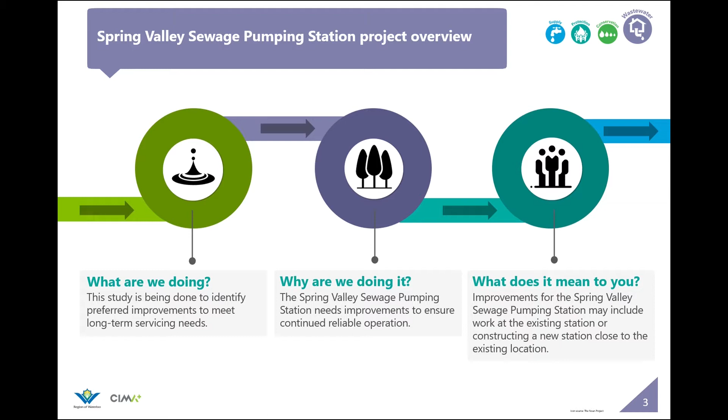Spring Valley Sewage Pumping Station Project Overview. To better understand the project, we ask the following 3 questions. 1. What are we doing? 2. Why are we doing it? And 3. What does it mean to you? To answer the first, this study is being done to identify preferred improvements to meet long-term servicing needs for the Spring Valley Sewage Pumping Station. Why are we doing it? The Spring Valley Sewage Pumping Station needs improvements to ensure continued reliable operation. What does it mean to you? Improvements for the Spring Valley Sewage Pumping Station may include work at the existing station or constructing a new station close to the existing location.

Pumping stations are an important part of our wastewater system. Wastewater is generated at homes and businesses through everyday activities like showering, flushing the toilet, or washing the dishes. When it leaves our homes and businesses, it enters the city's underground network of sewers. Wastewater flows through sewers by gravity from areas of high elevation to areas of low elevation. Pumping stations like the Spring Valley Sewage Pumping Station are an important part of the wastewater conveyance system. They make sure that wastewater from low-lying areas gets to the region's wastewater treatment plant for treatment. In Kitchener, there is one wastewater treatment plant that receives wastewater from many pumping stations across the city. The wastewater treatment plant ensures that wastewater is fully treated before clean effluent is returned to the Grand River.

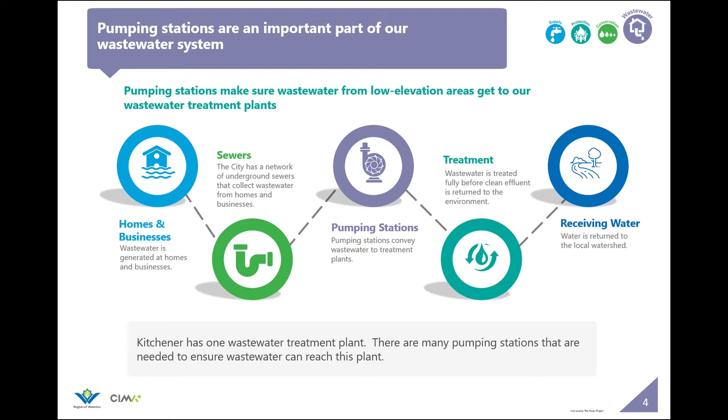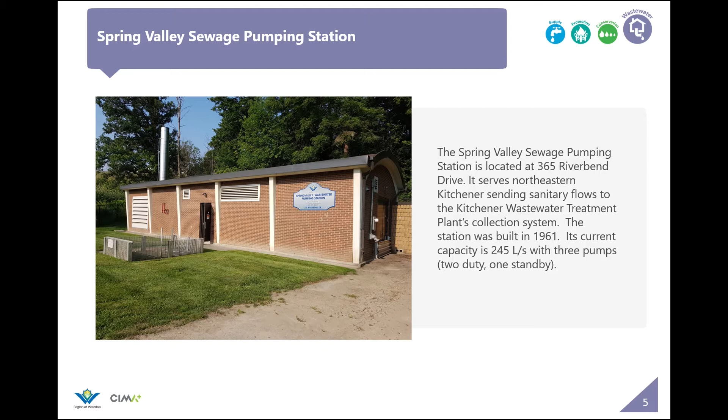Spring Valley Sewage Pumping Station. The Spring Valley Sewage Pumping Station is located at 365 Riverbend Drive. It serves northeastern Kitchener, sending sanitary flows to the Kitchener Wastewater Treatment Plant's collection system. The station was built in 1961, having been in service for almost 60 years. Its current capacity is 245 liters per second with 3 pumps, 2 duty, 1 standby.

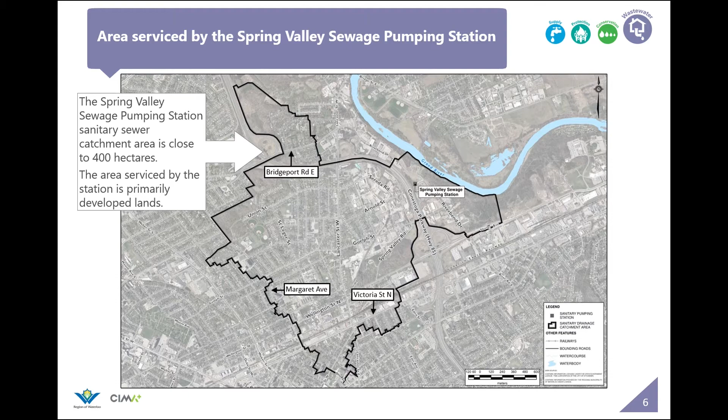Area serviced by the Spring Valley Sewage Pumping Station. The Spring Valley Sewage Pumping Station Sanitary Catchment area is shown on this figure. The area serviced by the station is primarily developed lands and generally extends south to Victoria Street North Highway 7, east to the Grand River, north to Bridgeport Road East, and west to Margaret Avenue. Currently, the total service area is approximately 400 hectares of residential, business parks, industrial, and open spaces.

Future capacity of the Spring Valley Sewage Pumping Station. During the Spring Valley Sewage Pumping Station Class Environmental Assessment Study, we took a detailed look at future peak flows using flow monitoring and modeling software to confirm the required future capacity for the station. The model examined future flows to the Spring Valley Sewage Pumping Station, including the predicted impacts of climate change and the addition of future developable industrial lands using information provided by the City of Kitchener.

The modeling results informed the recommendation to increase the Spring Valley sewage pumping station capacity to meet servicing needs up to the year 2051. Major infrastructure, which will be around for a very long time, such as the pumping station building and tanks, will be sized to meet the long-term 470 liters per second firm capacity. Equipment with shorter asset lives will be sized to meet the short-term 350 liters per second firm capacity. Examples of shorter asset life items include items such as pumps, instruments, and standby power generators.

An important consideration for the Spring Valley sewage pumping station was adding emergency storage. Proposed alternatives incorporate 1 hour of emergency storage based on the City of Kitchener design standards and best management practices from other municipalities. This will ensure that the station is more resilient to wet weather events due to climate change and provides improved protection to the natural environment.

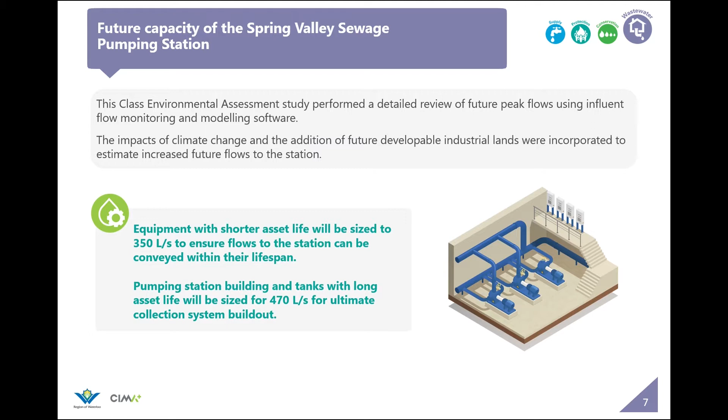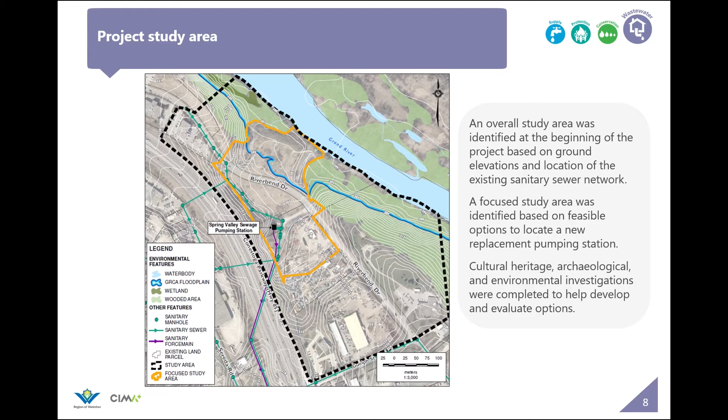We did an initial review of background information and identified an unevaluated wetland, woodland, steep slopeland, and watercourses within the overall study area. Because of this, we created a more focused study area to avoid sensitive natural features. The focus study area includes private and public property near the existing Spring Valley sewage pumping station, as shown here with an orange line. Investigations were conducted to assess cultural heritage, archaeological, and environmental impacts as they relate to the alternative solutions.

Cultural heritage findings in the study area. A cultural heritage resources investigation was completed as part of this study to evaluate culturally significant structures and landscapes located within the overall study area. The first step was to research the historical context in the overall study area. City of Kitchener and Region of Waterloo planners responsible for heritage matters were consulted. Any designated or recognized properties within the limits of the overall study area were identified and cataloged.

The project team completed a site inspection and created an inventory of all properties with potential built heritage resources and cultural heritage landscapes within, adjacent, and in proximity to the overall study area. Each potential cultural heritage resource that was identified was evaluated on the criteria set out in Ontario Regulation 9/06 for determining cultural heritage value or interest.

2 City of Kitchener identified cultural heritage landscapes were located in the overall study area, including the Grand River Corridor and the Walter Bean Trail. An evaluation of potential project impacts on the cultural heritage resources was also completed and strategies were identified to protect them in the future.

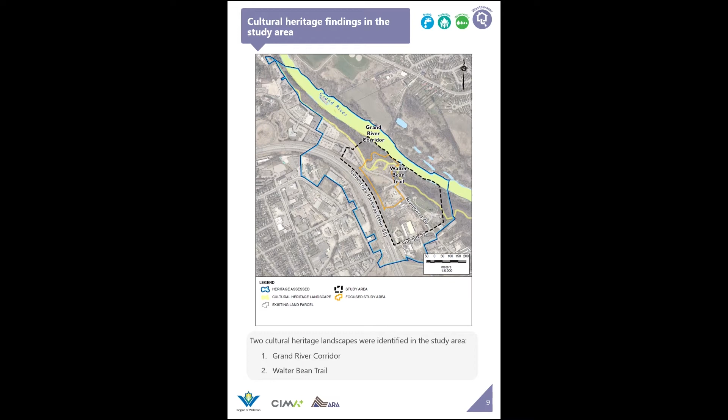Archaeological findings in the study area. A Stage 1 archaeological assessment was performed to provide a comprehensive review of archaeological features in the overall study area. This was done through an examination of the archaeology, history, geography, and current land conditions. This gave us an inventory of known archaeological sites within 1 kilometer of the overall study area and previous archaeological fieldwork within 50 meters of the overall study area.

The assessment identified areas of archaeological potential, no archaeological potential, and areas that had already been assessed or disturbed. An area of archaeological potential is one where buried archaeology is more likely to survive, whereas steep-sloped, permanently wet, exposed bedrock, or otherwise disturbed areas indicate areas of no archaeological potential.

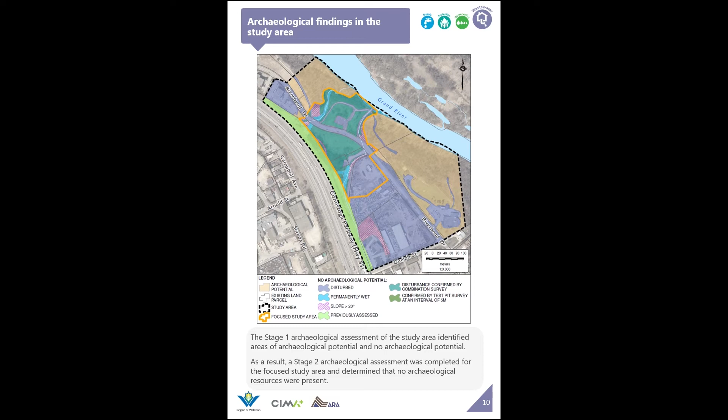A Stage 2 archaeological assessment was done in the focus study area to learn more about areas of archaeological potential that were identified during the Stage 1 assessment. Stage 2 investigation involves making small test pits at set intervals across the areas of archaeological potential. The focus study area was found to consist of mostly disturbed soils due to the long history of industrial and urban development over time. The Stage 2 assessment did not identify any archaeological materials. Based on these findings, no further archaeological assessments are required in the focus study area.

Environmental features in the focus study area. Environmental investigations in the overall and focus study areas were completed to review the opportunities and constraints of alternative solutions. A review of background information was performed first to provide a general understanding of the location, extent, and significance of natural features in the overall study area. Field investigations were then completed to confirm the extent of sensitive natural heritage features.

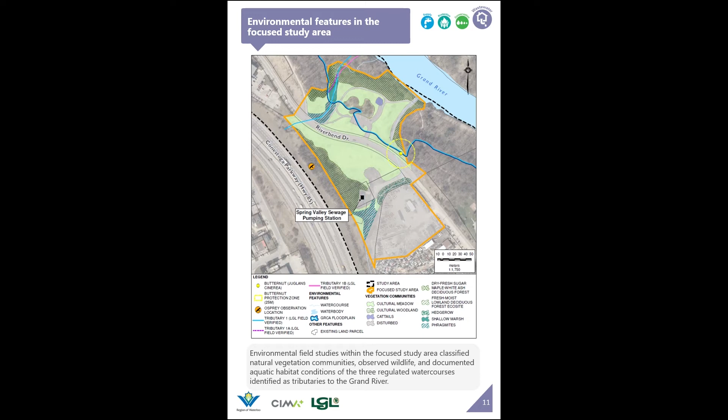2 key species were found as part of the field investigations. An osprey, which is protected under the Fish and Wildlife Conservation Act, was observed outside the boundary of the focus study area on the East Highway 85 easement. 1 small butternut was found on the north side of Riverbend Drive. Butternut is listed as endangered under both the Federal Species at Risk Act and the Provincial Endangered Species Act.

Alternative Solutions Development. We've considered and screened a number of alternative solutions to meet the long-term servicing needs for the Spring Valley Sewage Pumping Station. Do nothing and limit community growth options were considered for the Spring Valley Sewage Pumping Station. However, these options did not meet the project objectives.

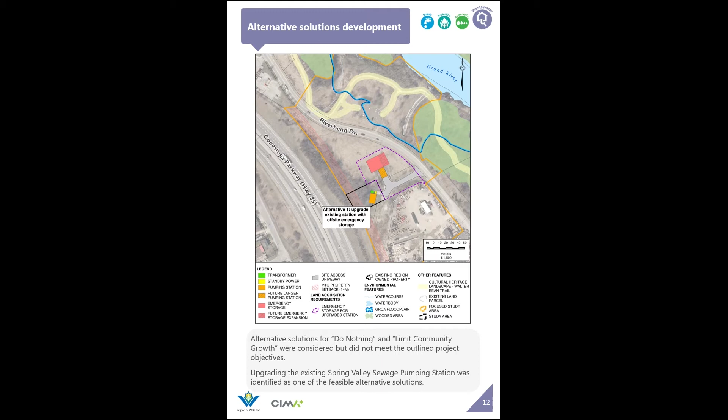Upgrading the existing station and providing off-site emergency storage was identified as a feasible alternative. This alternative focuses on upgrades within the existing building and existing site. However, the size of the property is not large enough to accommodate the emergency storage tanks. As a result, off-site storage was identified in the area north of the existing station. Upgrade the existing station with off-site emergency storage will be referred to as Alternative 1.

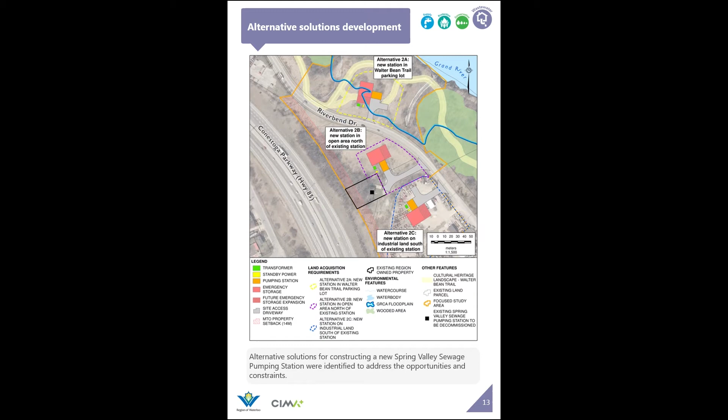Alternative Solutions Development. The second alternative involves 3 sub-options for constructing a new station on an off-site property close to the existing station. The potential siting locations for a new station include the Walter Bean Trail parking lot area on City of Kitchener property north of Riverbend Drive, referred to as Alternative 2A, the open area north of the existing station on City of Kitchener property west of Riverbend Drive, referred to as Alternative 2B, and the industrial land south of the existing station on private property west of Riverbend Drive, referred to as Alternative 2C. Alternative Solutions 1, 2A, 2B, and 2C were carried forward into the detailed evaluation process.

Alternative Solution 1, upgrade existing station with off-site emergency storage. Alternative 1 involves upgrading the existing station and providing land for emergency storage. The existing station is located on a plot owned by the region that is surrounded by City of Kitchener land and the Highway 85 easement. The majority of the existing infrastructure, including the station building and wet well, can be reused to upgrade the existing station. However, there is not adequate space within the existing site to accommodate the emergency storage.

Given that the existing region-owned property is heavily treed, sloped, and within the Highway 85 property setback, the installation of emergency storage would require a section of nearby City of Kitchener property to be acquired, as shown on the figure. In addition, space for constructing a new station in the future will be required to accommodate the expansion of the station to meet the ultimate capacity of 470 liters per second.

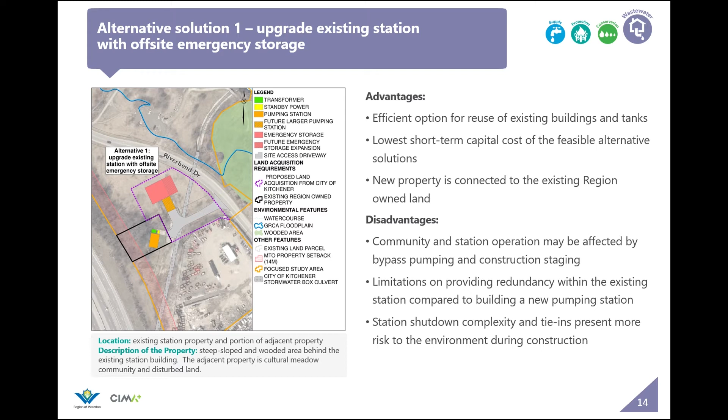The advantages of Alternative 1 include the efficient reuse of existing buildings and tanks, lowest short-term capital costs, and adequate footprint of the adjacent site to accommodate emergency storage. The disadvantages of Alternative 1 include the potential for impacts to the community and station operation during construction, the limitations for providing redundancy of process equipment when using the existing station infrastructure, and the increased risk to the environment due to station shutdowns and tie-in complexity.

Alternative Solution 2A, new station in Walter Bean Trail parking lot. Alternative Solution 2A involves constructing a new station north of Riverbend Drive, adjacent to the Grand River on a property currently occupied by the Walter Bean Trail parking lot. This site is partially within the Grand River Conservation Authority's regulated floodplain. It also contains a small cultural meadow community and open-grown trees.

The advantages of Alternative 2A include minimal impacts to businesses and minimal conflicts with existing utilities for a station sited at this location. The disadvantages of Alternative 2A include the disruption of core environmental features as part of the Grand River Valley, the need for additional flooding prevention provisions, the potential for noise and odor impacts due to its proximity to the Walter Bean Trail, and the need to relocate the parking lot and trail access.

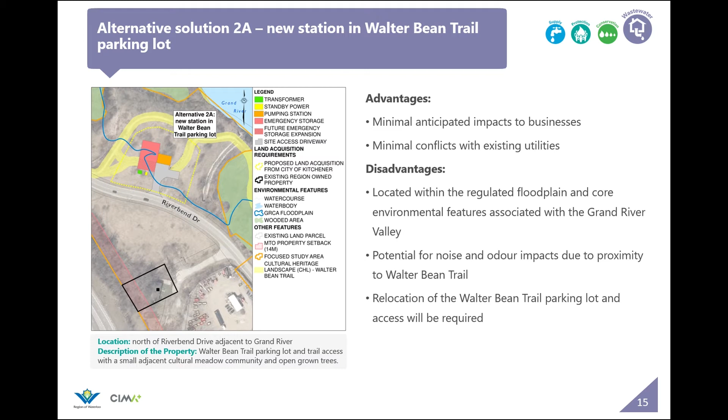Alternative Solution 2B, new station in open area north of existing station. Alternative Solution 2B involves constructing a new station in an open area north of the existing station on the west side of Riverbend Drive. This site contains a cultural meadow community and disturbed land.

The advantages of Alternative 2B include minimal impacts to businesses and the public during construction and operation of the station, its proximity to the existing station and sanitary sewer network, which will reduce the depth required for the station, the available staging area to limit conflicts with ongoing operation of the existing station, and its location adjacent to the existing region property. The disadvantages of Alternative 2B include its proximity to the existing City of Kitchener stormwater sewer, which will complicate construction.

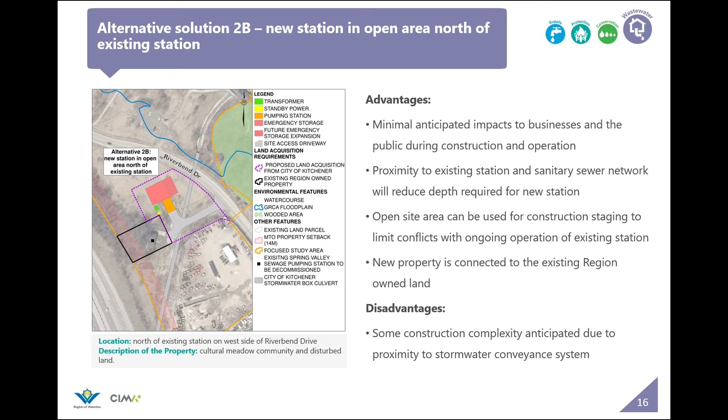Alternative Solution 2C, new station on industrial land south of the existing station. Alternative Solution 2C involves constructing a new station on industrial land south of the existing station on the west side of Riverbend Drive. This site is composed of primarily industrial land.

The advantages of Alternative 2C include minimal impacts to the environmental features and wildlife due to the disturbed nature of the site and minimal anticipated impacts to the public during construction and operation of the station. The disadvantages of Alternative 2C include its high capital costs, impact on the business currently using the industrial site, and the additional site preparation considerations and disposal of excavated material requirements.

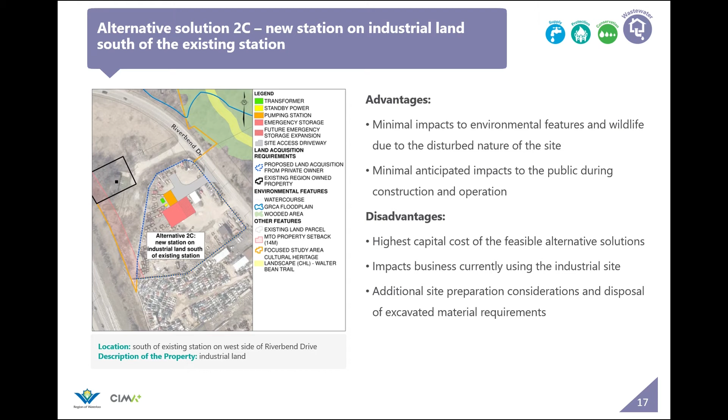Evaluation criteria. Detailed evaluation criteria were used in the assessment of the alternative solutions. Four main criteria categories were identified to include environmental, technical, financial, and social considerations. Specific factors were considered within each of the four criteria categories. Factors related to the environmental criteria included protects environmental features, protects wildlife and species at risk, protects groundwater, streams, and rivers, and minimizes climate change impacts.

Factors related to the technical criteria included provides reliable service, meets existing and future needs, aligns with existing and planned infrastructure, aligns with existing and future land use, aligns with approval and permitting process, manages and minimizes construction risks, and ability to adapt to climate change. Life cycle costs from capital, installation, and operation and maintenance costs were considered as part of the financial category.

Finally, factors related to the social criteria included minimizes impacts to residents related to noise, odor, traffic, and aesthetics, minimizes impacts to businesses, manages and minimizes construction impacts, protects cultural heritage features, protects archaeological features, and protects health and safety. The Spring Valley Sewage Pumping Station alternative solutions were evaluated according to the factors shown here, with each of the environmental, financial, technical, and social categories being considered equally. The highest score identified the preliminary preferred option.

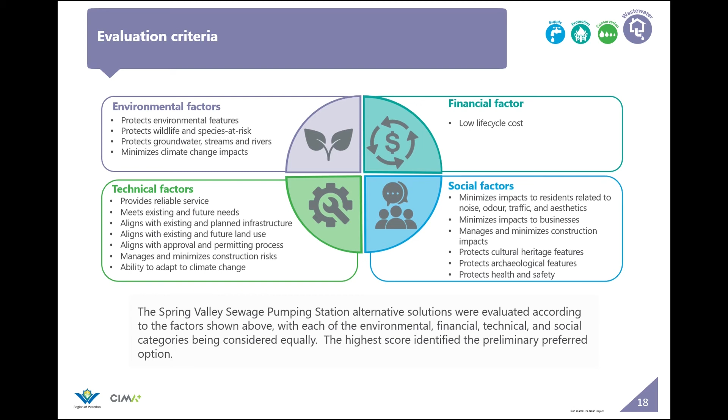Evaluation methodology. An evaluation system was developed to be used in the selection of the preliminary preferred alternative. Scoring of alternative solutions was completed to evaluate how each alternative met the criteria. Scores were assigned for each criterion depending on if the alternative solution was very well aligned with criteria, well aligned with criteria, somewhat aligned with criteria, not well aligned with criteria, or had low alignment with criteria. The full blue circles represent a more preferable option, while empty white circles represent a less preferable option.

The evaluation process included three sequential steps. Step 1 identified advantages and disadvantages for each alternative solution. Step 2 involved assigning criteria scores for each alternative solution, and Step 3 determined the preliminary preferred alternative solution based on the results of the evaluation scores.

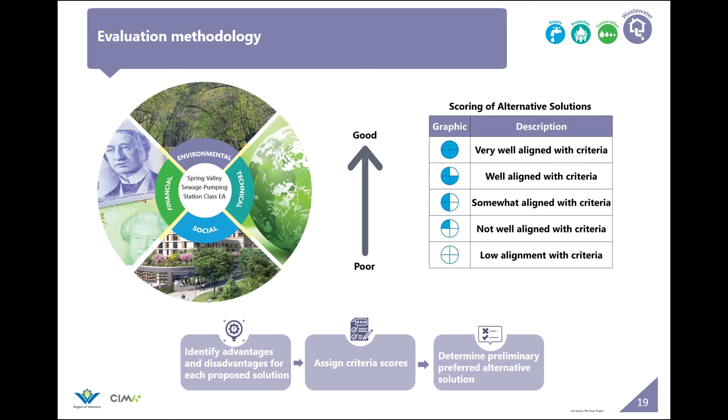Evaluation of alternative solutions. Alternative solutions were put through a detailed evaluation that included environmental, social, technical, and financial considerations. Higher scores were assigned to solutions that would reduce or eliminate potential impacts. Alternative 2C scored the highest in the environmental category because construction of a new station on industrial land presents minimal environmental impacts. Alternative 2B scored the highest in both the social and technical categories as construction of a new station in an open area close to the existing station is expected to have minimal impacts on the community and the existing station operation.

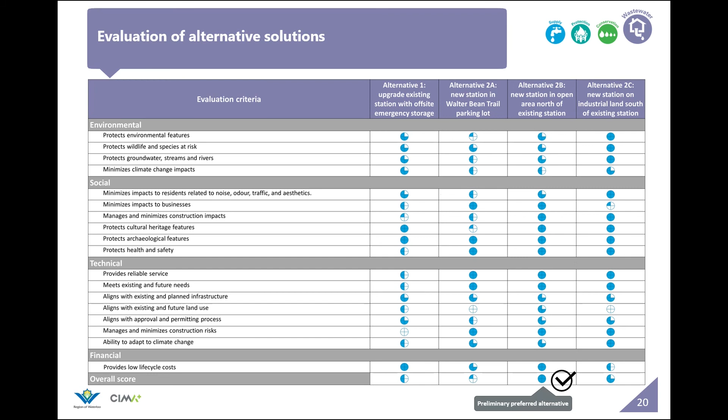Alternatives 1 and 2B are anticipated to have similar 50-year life cycle costs and therefore both achieve the highest score in the financial category. Alternative 2B, construct a new station in the open area north of the existing station, achieved the highest overall score and is being recommended as the preliminary preferred alternative.

Preliminary preferred solutions or alternatives. Key advantages of the preliminary preferred alternative to construct a new station in the open area north of the existing station include the ability to operate the existing station during construction, the proximity of the proposed new station site to the existing station and sewer network, and the best overall score considering environmental, social, technical, and financial factors.

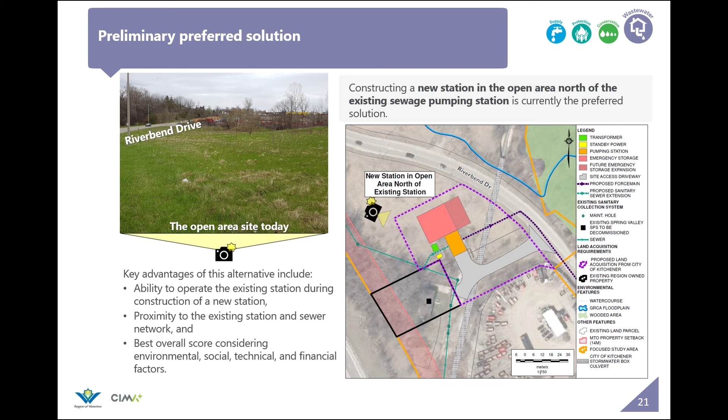Project schedule. After completing this Public Consultation Center 2, the next steps for the project team will be to review and consider public input received during this Public Consultation Center and confirm the preferred alternative solution for the Spring Valley Sewage Pumping Station. A project file report will be prepared to document findings of this study and will be available to the public for a 30-day review period.